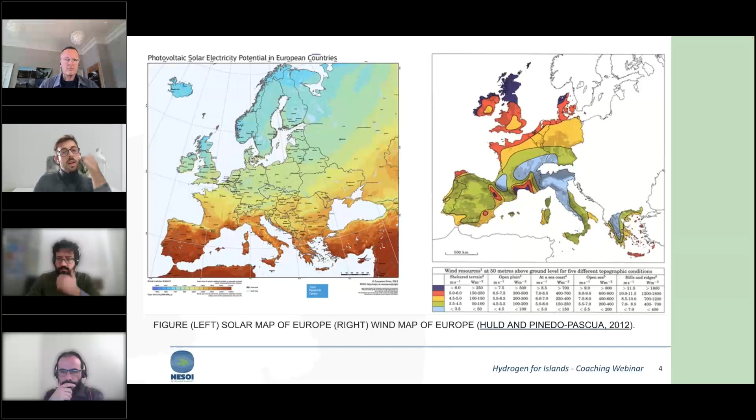As we mentioned, the renewable use of electricity in islands has not only benefits, but it has many challenges that need to be overcome in order to create a resilient energy system. Usually, the production capacity in islands is much higher than they consume or what the grid can handle. So we see that there are many schemes of surplus production and curtailment, where that energy gets lost because of not having adequate energy storage facilities.

This compromises a lot the security of the island, which sometimes has to rely again on fossil fuels, increasing prices for the local community and driving the discrepancies with other energy systems in the mainland. On the other hand, some applications cannot be electrified, so we need to find solutions regarding the utilization and production of renewable energy sources, and this is why we've seen a lot of potential for islands in the development of hydrogen ecosystems.

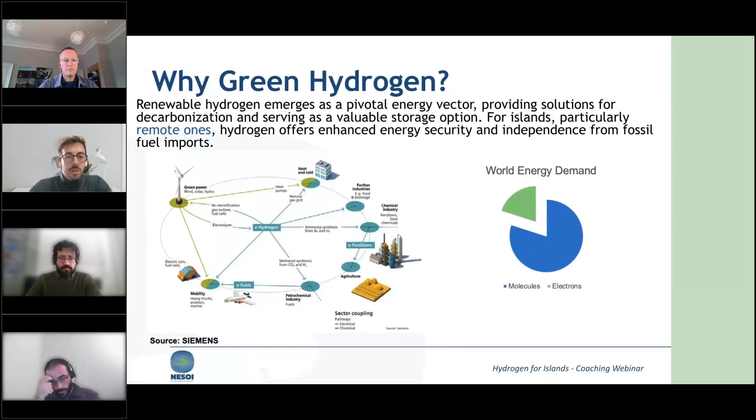As we can see, hydrogen covers many aspects on the whole value chain. Islands could, in this regard, if we see islands producing and exporting hydrogen to the mainland, become the new energy exporters of the world, shifting from what we used to have in our supply chain, fossil fuels coming from other countries where the political or geographical situation was difficult for the development of our countries. Now we can see how the production of green hydrogen, shifting from fossil fuels to the use of it, just by having abundance of renewables and also water supply, could bring also energy security to different countries and will position islands in a very interesting point.

Of course, one big challenge is that when we're talking about green hydrogen production, we need to consider water resources, which sometimes are in competition, more so in an island context. This is an aspect that can be overcome considering the use of desalination, or even in the innovation we're seeing, we expect that in the future it would be also possible to produce hydrogen directly from salt water with high efficiency. So in the future, we've seen that islands will have this opportunity, and it will bring equality back to the islands, which in the energy system that was developed over the past years, it didn't.

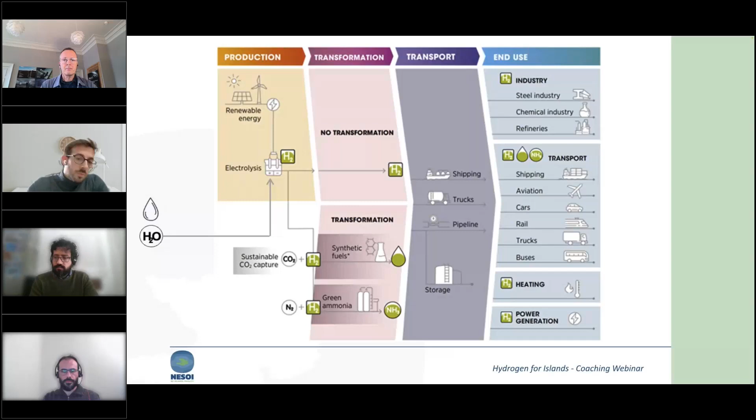Next slide, please. Okay, so what I want to end up with and show is that small demo projects in islands, but in general, could bring a really added value to the development of the hydrogen economy. As we've seen, a hydrogen island is a hydrogen valley itself, as it's a limited geographical area. We could have the whole value chain in that restricted area. Different hydrogen technologies come together because we have from production till utilization, different ways of transport, storage, and then we have an integrated ecosystem that is orchestrated by the island, the local community, and at the end we aggregate the volumes, and that makes the whole project thrive and improve the economy behind it.

Contributing to the development of the hydrogen economy, islands are a really good example to showcase how an ecosystem which is isolated or remote can increase their capacity and also improve the economics of the whole project and bring hydrogen to reality.

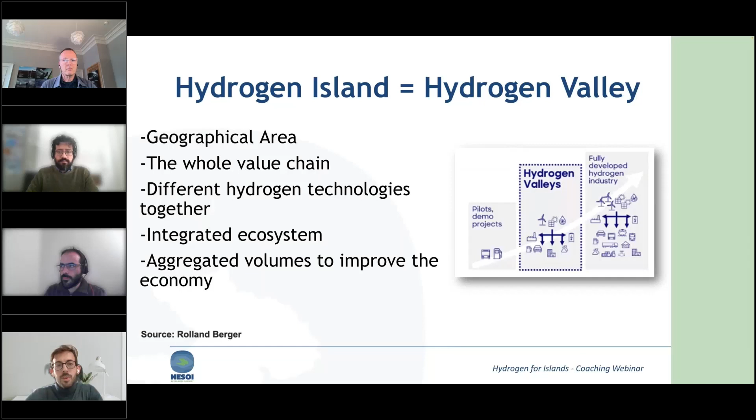Okay, as I said, now we're going to move to an introduction of the projects. First, we're setting foot on one of the islands of the Aegean Sea, specifically Kos. Kostas Chasapis from DAFNI will present the GHEKO project, which is an initiative to bring hydrogen production and a hydrogen ecosystem into one of the Greek islands, specifically the island of Kos. So thanks all, and I leave the floor to Kostas.

Thank you, Bruno. So I would like to welcome everyone in this very interesting webinar about hydrogen in islands, which can be ideal test beds for this kind of technology ecosystems. My name is Kostas Chasapis, on behalf of DAFNI Network for Sustainable Islands, and I will present the NESOI project, the GHEKO project for the Kos Island, which is the green hydrogen ecosystem on Kos Island.

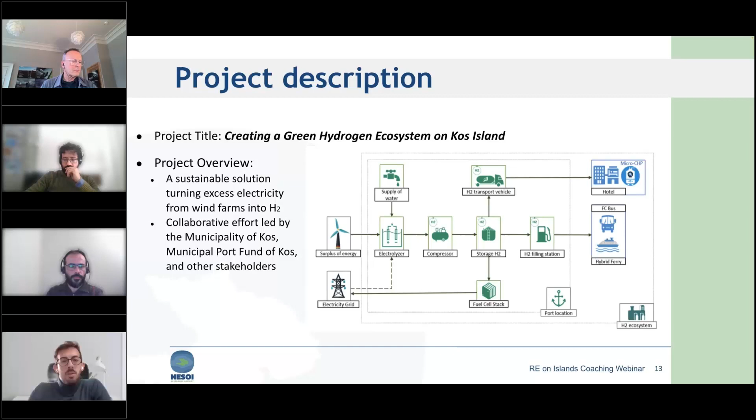The main components of the project are the electrolyzer, the hydrogen tanks, so the hydrogen production and storage facilities, the refueling stations that will serve the municipal bus and the ferry at the Mastichari port of Kos Island, the CHP stations that will be used to provide electricity and heating to the municipal buildings, and of course the fuel cells that will transform hydrogen back to electricity and supply it to the island's grid.

In addition, there will be this hydrogen-based ferry that will be modified, so it will not be a new one, but the current one will be modified so it will be able to run on hydrogen too. And of course, there will be a synergistic integration of various hydrogen consumption facilities, thus reducing transportation costs.

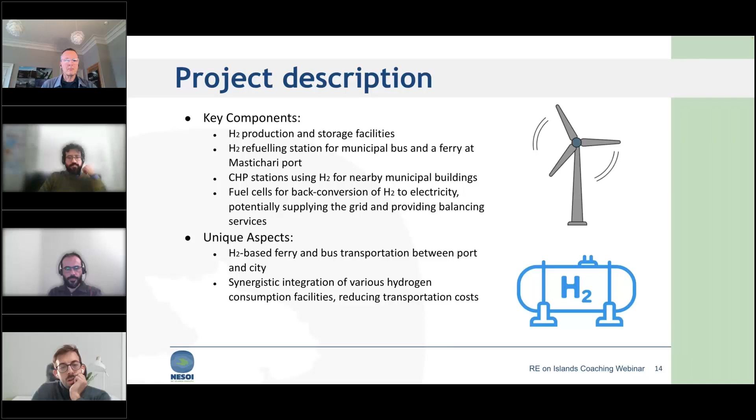Now, the lessons that we have learned through the whole project and our study with it is that, first of all, a hydrogen ecosystem is indeed feasible on non-interconnected islands. One also very important lesson is that green hydrogen needs substantial funding because the capex is still an expensive technology, and particularly for small isolated islands, the costs increase furthermore. The curtailed wind energy, specifically for the Kos Island that we did the simulations and calculations for, is able to provide a substantial part of the island's energy, but is not able to cover 100% of the energy needs.

The project, mainly due to the fact that there is no additional renewable capacity, so no new wind farms, only curtailed energy is exploited, has high social acceptance, and this means it will be relatively easier to realize. Furthermore, the seasonality of the demand, because it is an island with quite seasonal energy demand which peaks during the summer months due to tourism, affects the storage sizing of the system, and this in turn has an impact on the overall profitability of the project.

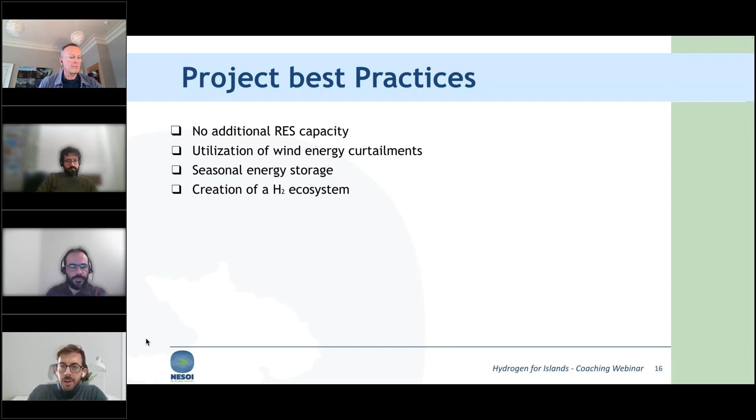Thank you, Kostas. Really interesting case of how a society can leverage curtailment and make it profitable. Now we're moving to the cold and windy Northern Isles with David Amos, Managing Director of PlusZero, who is guiding the GoHme project. We are going to discover a little bit more how this project seeks to expand the market while blending innovation and cost-effectiveness solutions.

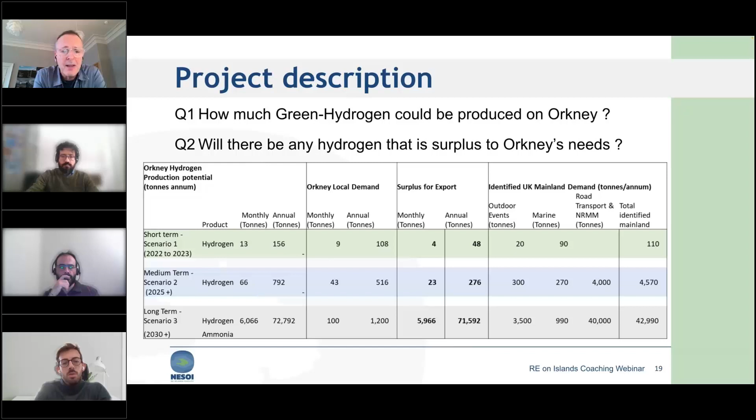And then, having identified that there is surplus hydrogen going to be produced, we started to look at how could you move that from Orkney to those mainland markets. So RINA did a very significant piece of desktop research for us, looking at the economic model around hydrogen production and export at scale, looking at what are the most cost-effective routes to moving hydrogen, whether that is in gaseous form and compressed gas or through pipelines, or converting hydrogen into derivatives like methanol, ammonia, liquid organic carriers. So we had that research, understanding of the different routes and cost effectiveness.

And then we looked very practically at how we could move the smaller amounts that are being produced in Orkney at the moment, talking to the local transport companies, the local ferry companies. We did a detailed analysis of the current regulatory environment, the health and safety regulations that would be required to ensure that hydrogen can be moved safely, both by road, on the island ferry, and then on the mainland ferry to reach markets.

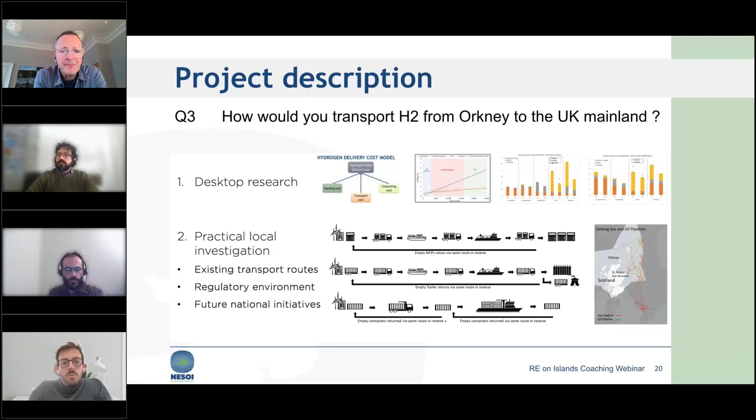And then, having identified that A, there was going to be surplus hydrogen available in Orkney, B, that we could transport it safely and within the rules to the mainland, we looked at what are the current commercial opportunities for hydrogen that is produced in Orkney at the moment. And we identified 3 markets, 2 of which PlusZero, my company, is already active in.

So outdoor events, these are sporting, music, cultural events that use diesel generators to provide the power. Some of them are very interested in decarbonising and becoming much more green and sustainable, and they are willing to pay a premium for that in the 20 to 30 pounds a kilo, or 23 to 34 euros, for hydrogen. And that in its own right is quite a significant market. It could take up to 90,000 tonnes of hydrogen a year.

That's in the UK. Then outdoor film production, where again they use diesel generators to power the lighting and the equipment they use, and they are willing to pay a little bit more in the UK. People like Netflix and Amazon. Again, there is a big focus on film production becoming much greener, and therefore a willingness to pay a premium for that. And then the final area is hydrogen innovation projects.

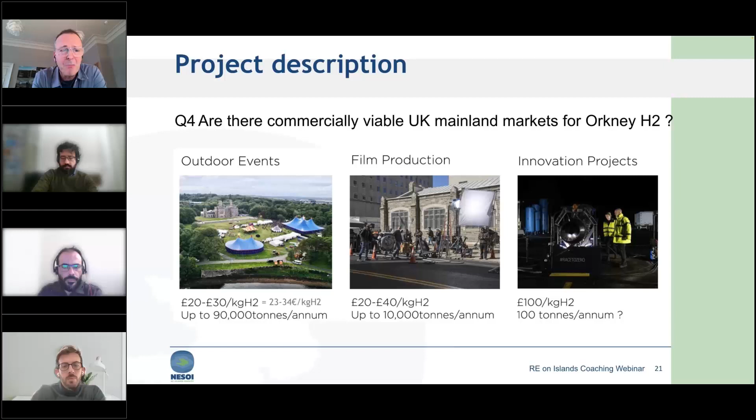So the key lessons that we learned through the project, the first was that yes, the customers view very favourably the idea of buying hydrogen that is produced in an island community where the production of the hydrogen is bringing benefit to the local community. So in Orkney's case, many of the wind turbines that produce the renewable energy are within community ownership, and therefore hydrogen is creating more demand for the electricity that they produce. So that is all seen as a very positive story.

We also identified that in the UK mainland there are customers who are willing to pay a significant premium at the moment for that green hydrogen from the islands, and that therefore there is a market that can help support the development of a hydrogen production sector in the islands.

A big impact during the project was the UK electricity price very significantly increased following the Russian invasion of Ukraine, and that did have a big impact on the cost of electrolysis, adding about £21 a kilo to the cost of production. And at that point, it had pushed the price above what some of the markets were willing to pay. But in the UK, that price has started to fall back down. But we are still paying quite a high price for electricity at the moment.

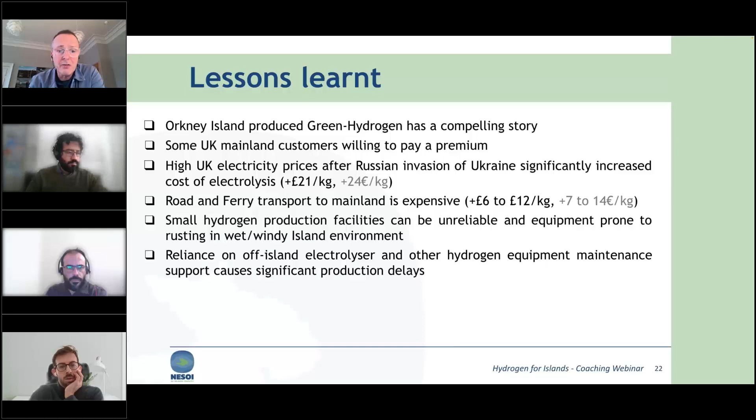And then some best practices. Well, we did that very detailed strategic analysis of the potential for green hydrogen production, both in the short, medium and long term in Orkney, and understanding what the potential demand for hydrogen on the island could be once you start to use hydrogen across the range of things that have been identified as feasible: ferries, transport, heating, power and the like. They can consume a certain volume of hydrogen on the island going forward, but will still be much smaller than the production potential. So we mapped that out strategically, and that's a very valuable reference document for the island.

We also identified that there are viable markets at the moment for any surplus green hydrogen produced on Orkney, which can help create additional valuable demand for producers, so that as they scale up their production, they are not only reliant on local demand, which might take several years to build up. We established a viable road and ferry transport route to move hydrogen from Orkney to mainland customers, meeting all of the regulatory requirements.

And the final question that we had set out to aim in the project is, can we achieve a successful demonstration of Orkney green hydrogen being used to support hydrogen innovation in the UK? And EMEC did manage that very successfully in November last year. They delivered the first commercial shipment of Orkney green hydrogen to Rolls-Royce, which is a UK aircraft engine company, and they were developing an aero engine that uses hydrogen as a fuel, and so it was Orkney green hydrogen that was delivered to support that development at a very high price as well. Thank you.

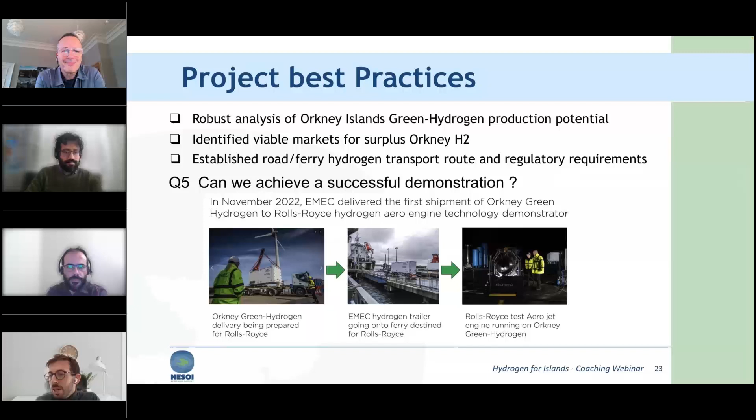So now we finally land on the African coast. We go into Gran Canaria with Domenico Ferrero from Politecnico di Torino, who is bringing us the REMOTE 2.0 project that explores an initiative in Aldea, which is redefining sustainability in a remote island location, showcasing global potential for renewable energy. So, Domenico, the floor is yours.

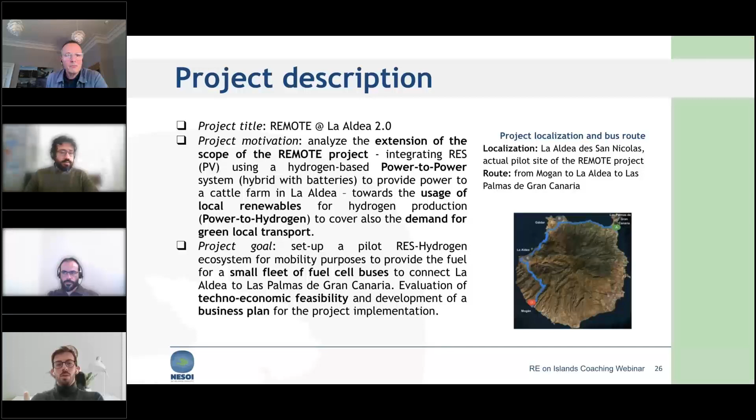The configuration of the plant that was identified in the analysis takes into account different options for hydrogen production, hydrogen storage, and the infrastructure needed to provide hydrogen to buses. So the best option identified combines wind power and photovoltaic power, with a wind turbine of 1 megawatt and a 500 kilowatt PV plant.

This was done also taking into account that in the specific location a wind turbine was already there, so it was considered to increase the size of the wind turbine as an option, and of course increase the size also of the PV. It was already installed in the location, especially for the remote project, but was of a smaller size. And it has been considered the use of water coming from the local desalination plant.

In terms of size of the system, a 400 kilowatt electrolyzer was found to be the best trade-off between the generation efficiency, considering the local profile of renewables and the demand, which is around 100 kilos per day. It was considered to use a low temperature electrolyzer combined with a hydrogen compressor to provide hydrogen at 300 bar, with a storage of 300 kilos at 300 bar, and then connected to a refilling station.

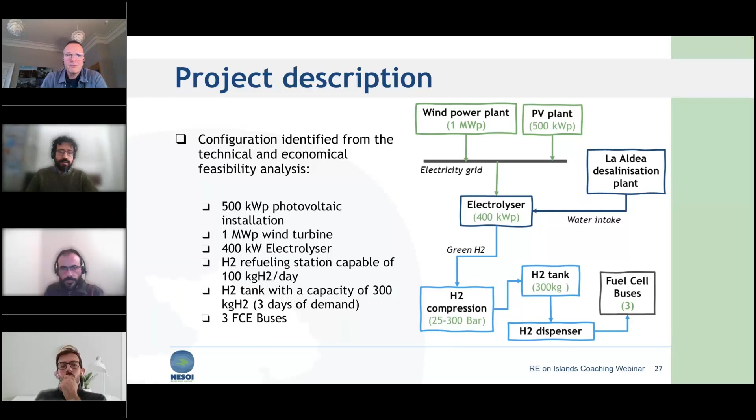What are the results that we obtained? In terms of the hydrogen demand, we are talking around 100 kilos, a little bit less, like 80 kilos per day. And the route that has been considered covers a distance of like 1,500 kilometers. So it's covering all the west part of the island.

The economic feasibility study focused especially on identifying the conditions in which this hydrogen mobility could reach at least parity compared to diesel mobility, considering the diesel price and the current investment cost for the different subsystems. The analysis included also the option of having some grant to cover part of the capex. By considering a scenario with a 60% capex grant, the results show that it is possible to implement this kind of project, considering a PPA, an agreement with some renewable producer, and to achieve an internal rate of return of 6% with 12 years of payback.

Especially when considering parity with the diesel price, if we are talking about a price of around €1 per liter, then the investment cost could be recovered if the electricity is available at around €80 per megawatt hour, which is a feasible price there. Of course, we are considering that the initial investment, in order to reach parity, should be covered by a 60% capex grant.

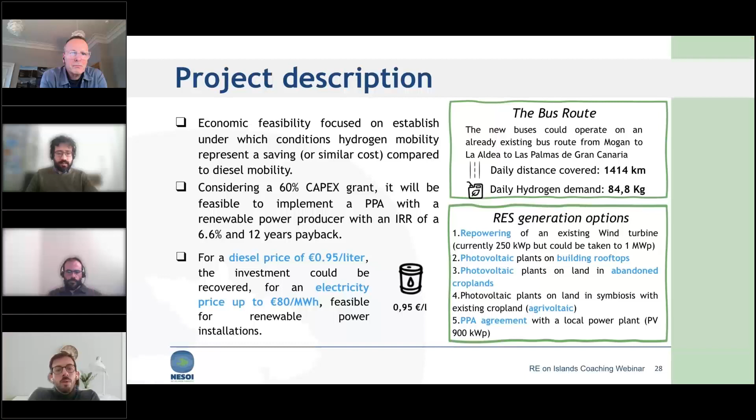So what has been found as a lesson learned from the project is that the integration of photovoltaic and wind, which is the best option also from the techno-economic analysis, is really beneficial to ensure a high capacity factor of the electrolyzer. It has been found from the simulations that it could be higher than 80%. So it's very good for having a fast electrolyzer amortization.

In terms of replicability, the results shown in this project could be applicable especially to other islands where there is availability of both wind and solar. Gran Canaria is a particular place where both of them are really available. Another lesson verified in the project is the economic feasibility. It has been shown that it is possible to recover the investment if we consider that a part of the capex, the investment cost, is provided by support grants.

And then another point that has been found is that the particular location of Aldea is close to protected areas. Even if it's not really inside the protected area, it is an area in which environmental research is really encouraged. And we also find plenty of support already in the remote project for having some hydrogen project there. So it is really an interesting area for the implementation of a hydrogen demonstration for mobility.

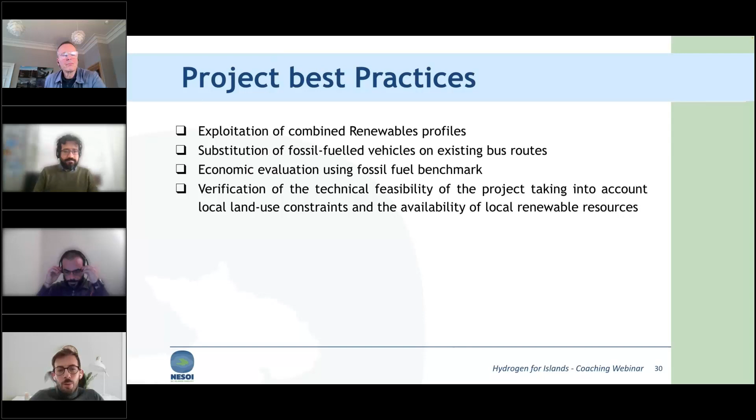Perfect. Thank you very much, Domenico, for the explanation. It's really interesting. And now we're going to go directly to a discussion session. I will pose a few questions for the speakers in a round table, and then I will give the floor to the attendees if they want to ask a specific question to our speakers or even to myself. And then we will wrap up the discussion with some conclusions.

So, next slide, please. The first question is for Kostas. You mentioned that the project had a high replicability. What do you think would be the main challenges given the geographical characteristics of the Aegean Islands or the Greek regulatory framework? Which are the main challenges you are encountering when trying to replicate these hydrogen ecosystems? Yes, thank you, Bruno.

Yes, we see that there is a high replicability potential of this kind of project in Greek islands. Of course, this is still at a theoretical level. The geography of the Greek islands is that most of them are small islands. There are many islands with very few inhabitants, maybe less than 3,000, or even much less. So there are many islands not interconnected to the electrical system.